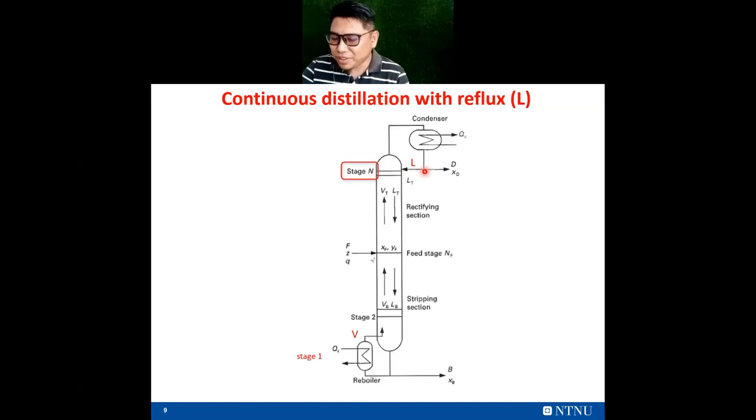Today we are very fortunate to have one of the world known process control professors, Professor Sigurd Skogestad from Norwegian University of Science and Technology, directly from Norway. In this webinar series, Professor Skogestad will present and discuss the topic of distillation modeling and control. Before I give this session to Professor Skogestad, let me give a little biography. Sigurd Skogestad is Professor of Chemical Engineering at NTNU in Trondheim, focusing on process control.

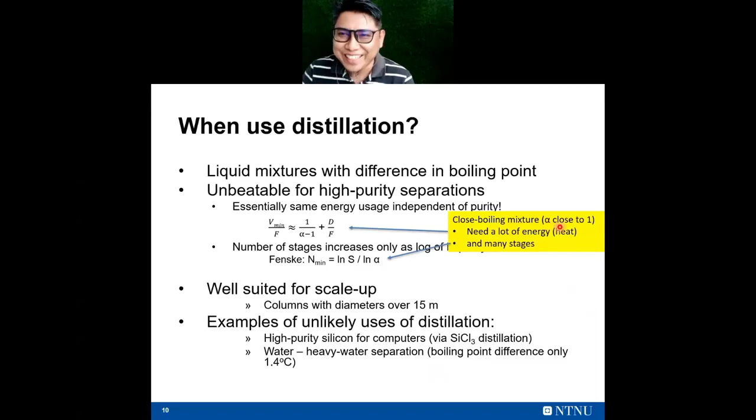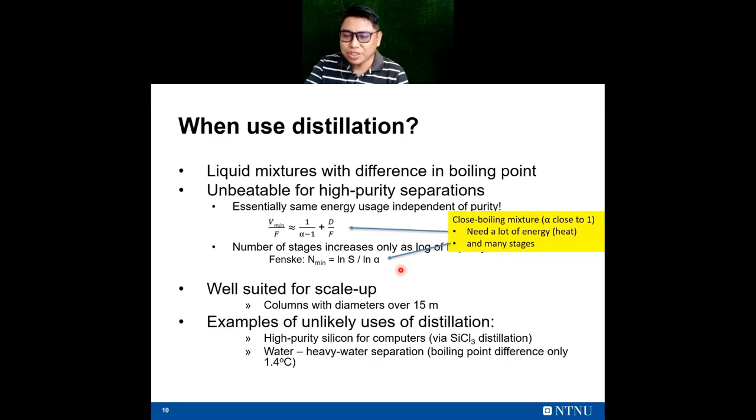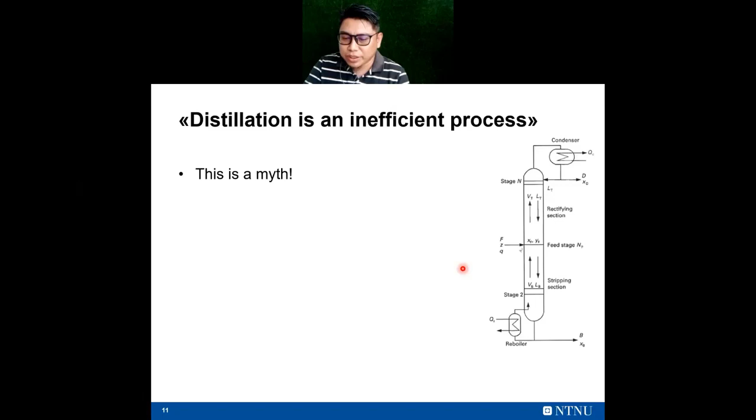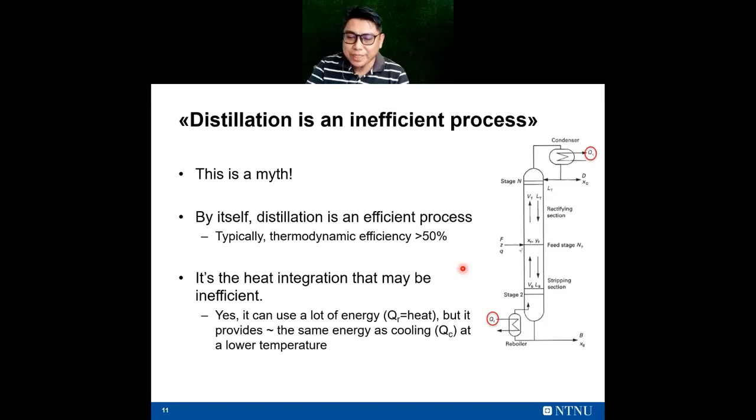He received a PhD from California Institute of Technology, Caltech. I'm reading your CV from your website. He has been a full professor at NTNU since 1987. He was head of the department of chemical engineering from 1999 until 2009, which is 10 years. Since 2015, he's been director of SUBPRO, a Center for Research-Based Innovation on Subsea Production and Processing. His research interests include process structure design, control structure design, and plant-wide control, optimal operation of process systems, modeling for control, robust control, PID control, and distillation column.

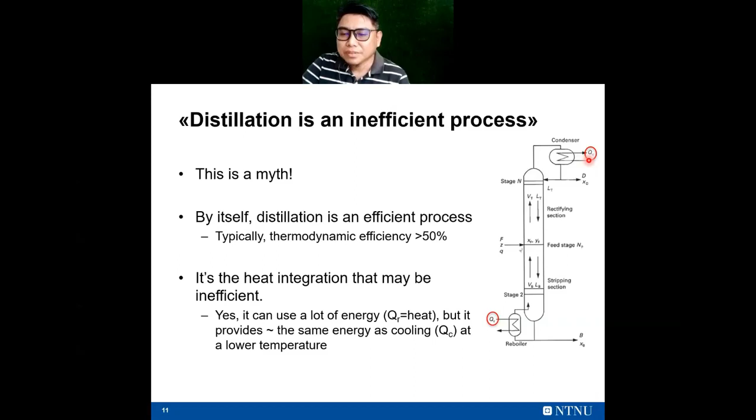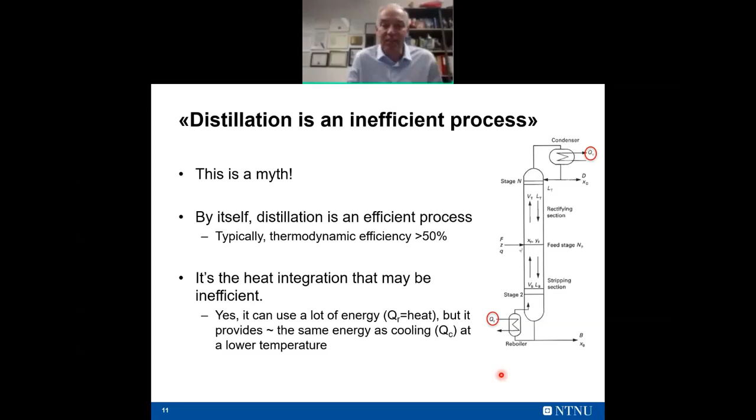Thank you very much for a very nice introduction. I think you covered most of my background, and I'm very happy to present this topic of distillation for you, because I've worked on distillation for many years, since the beginning of my career, and it's one of my really favorite topics. In addition to process control, distillation has been my main interest. It's a very interesting process, and it's very important in chemical engineering. So I will try to give you some background about it here today.

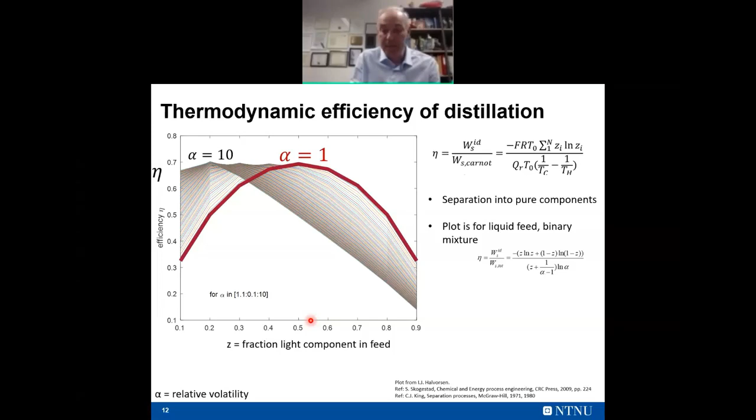So, about the talk today: it's about distillation, modeling, and control. I'll start with an introduction, a bit about the basis for the process. Then I'll talk about modeling, which is fairly easy in principle for distillation. I'll talk a bit about dynamics, optimal operation, and then control. So those are the topics. Let's start with the basis for distillation.

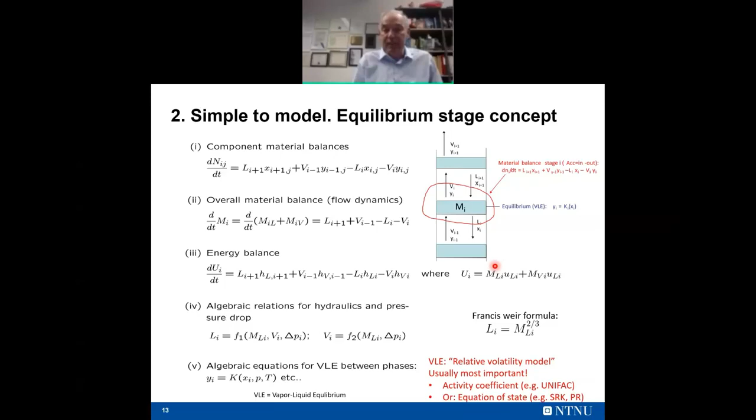A very important quantity is what we call relative volatility. You take the ratio between Y and X for the light component, which is greater than 1, divided by the ratio between Y and X for the heavy key component, which is less than 1. You get a number, alpha, which is greater than 1. If it's very close to 1, it's very difficult to separate using distillation. If it's large, it's good for distillation.

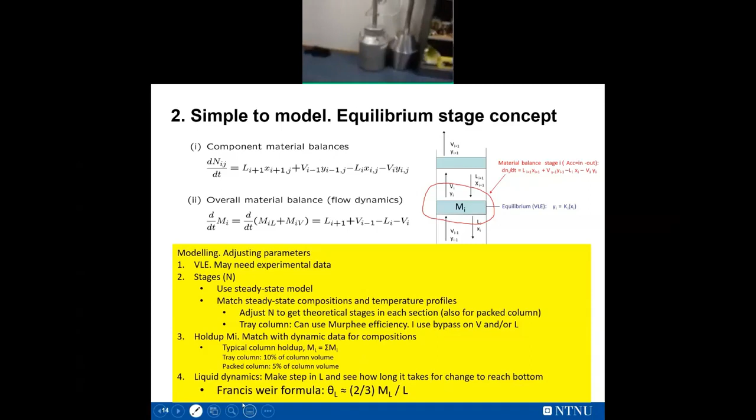Now, I actually have in my office a couple of columns, which is also batch distillation, but have reflux. I don't think you can see them here. I think so - here there's two columns, a bit similar design. Both of them will have reflux.

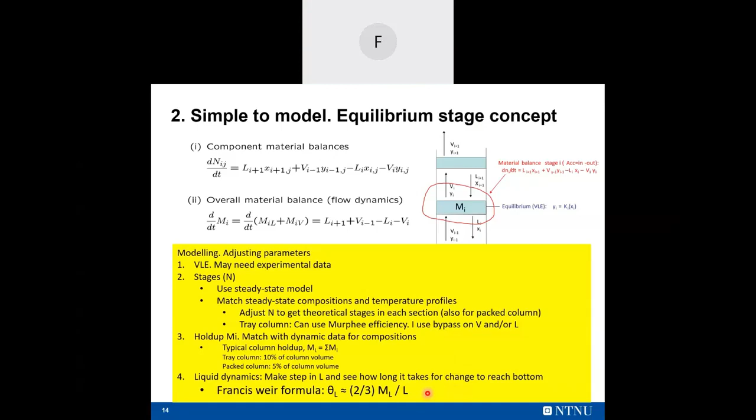And reflux also makes it like a recycled process, so it makes it a bit more difficult to model and understand. So this is...

I want to show you a continuous distillation column with reflux. This is how we separate in industry, and this is what we're going to be talking about today.

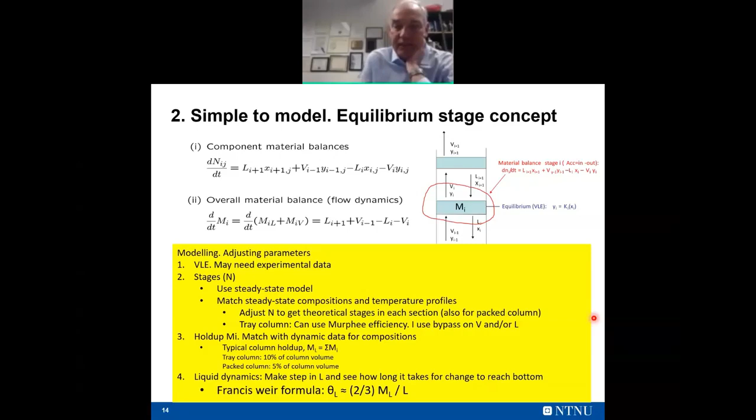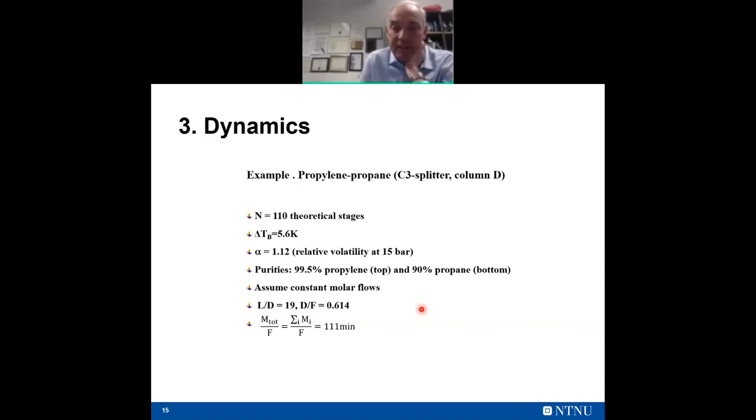So when do you use distillation? Well, you use distillation for liquid mixtures with difference in boiling points. That's the main starting point. And it's a very effective and easy, good separation, used a lot in industry, probably the most used separation method.

It's essentially unbeatable for high purity separation, and one reason is that the energy consumption is essentially independent of purity. It doesn't matter if you have it more pure, it doesn't cost more energy. And also the number of stages that you need to separate, that of course increases with the purity, but only in a logarithmic fashion. So it doesn't increase so sharply.

Also, distillation columns are well suited for scale-up. You can have columns with diameters up to 15 meters. And it's used even for some unlikely separations, like all the silicon that's made for computers is made by distillation via silicon chloride. Also, actually, heavy water separation is done by distillation, and it only has a boiling point difference of 1.4 Celsius. So it's used for many, many things.

And one thing that you should note is, of course, that for close boiling mixtures with alpha close to 1, relative volatility close to 1, then you will generally need a lot of energy or heat, and you will need many stages.

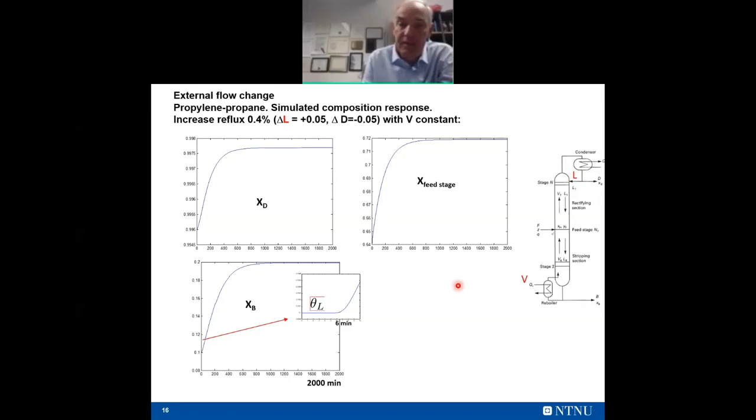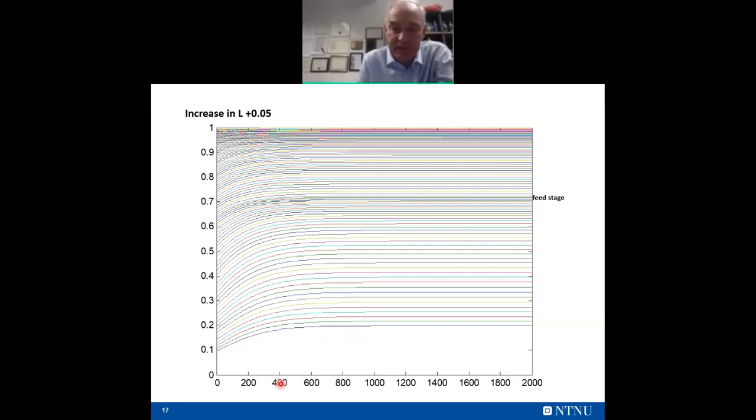So there's this myth, I would say, that distillation is an inefficient process because it uses so much energy. Well, yes, it's true that it uses a lot of energy for difficult separations, but actually by itself it's an efficient process. Typically the thermodynamic efficiency of distillation is better than 50%. So the reason people say it's not efficient is not because of the efficiency of the process itself, but because the heat integration may be inefficient.

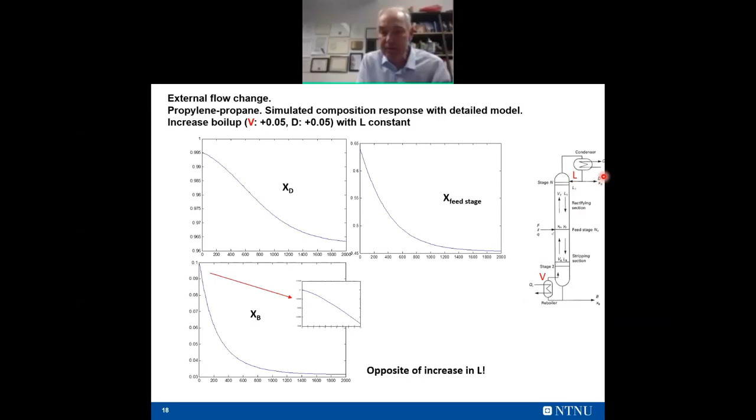Because yes, it may need a lot of energy to do the separation, but it provides the same energy back again as cooling at a somewhat lower temperature. For close boiling mixtures, this temperature difference is very small. So actually, by having proper heat integration, for example, you could have a heat pump between the top and the bottom. You can make very good heat integration and also get very good efficiency.

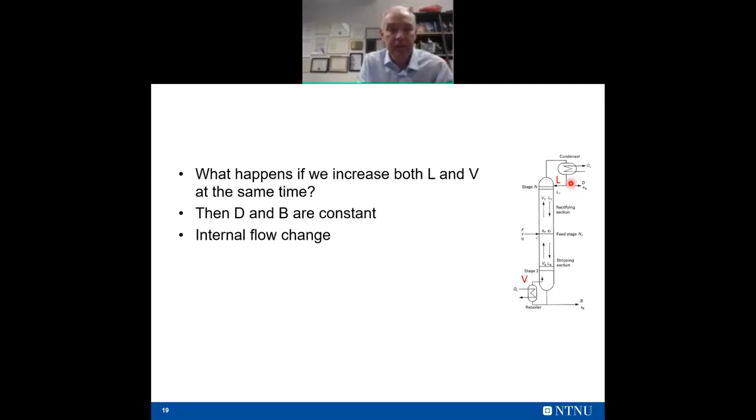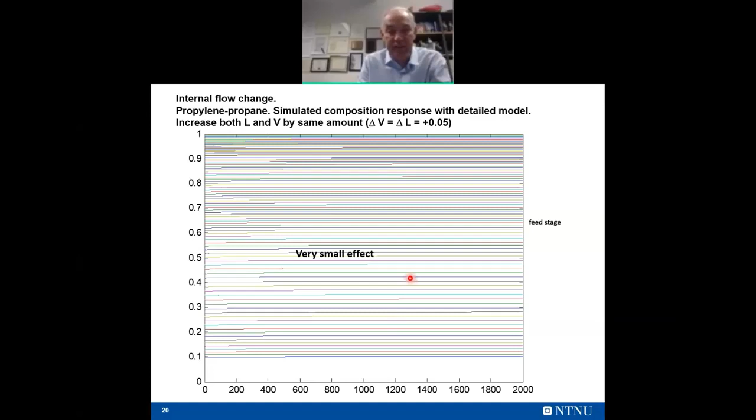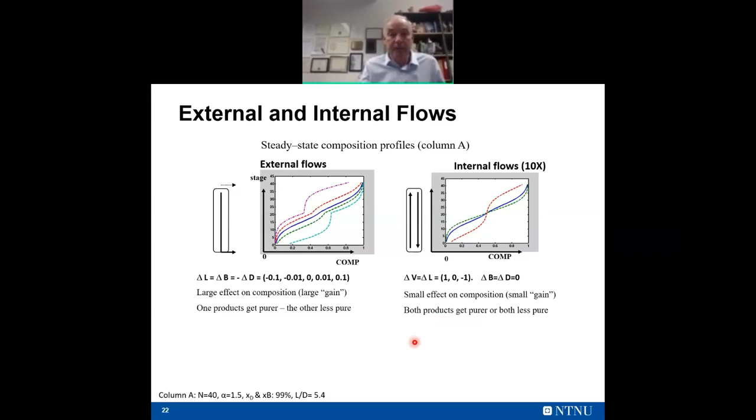And then a second thing now, about modeling. So modeling of distillation is in principle simple, and it's one of the simpler processes to model. It's a complicated process, but the modeling is simple. So normally what we use is the equilibrium stage concept.

So we model the distillation as just many stages in series, each having equilibrium between vapor and liquid on the stage. You have the vapor coming in from the stage below, the liquid from above, mixed on the stage, assuming equilibrium, and then you have the model.

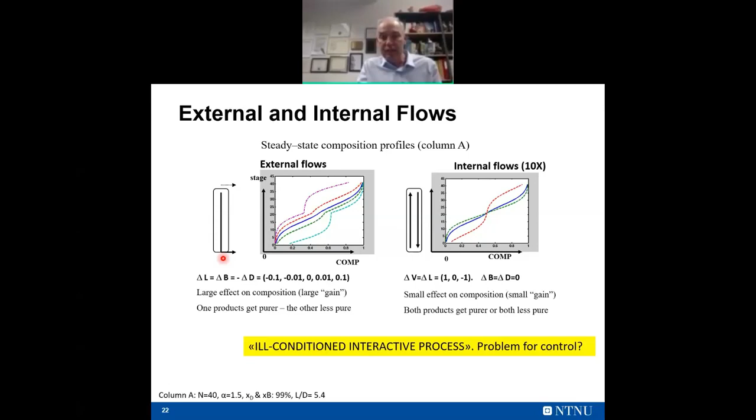And you have a lot of software now today. You have HYSYS, you have Aspen Plus and all these things, and you can quite easily model it. Sometimes people use non-equilibrium models, but I think in most cases the simple equilibrium models are efficient and are used in practice. So just a bit more detail about how you do the modeling.

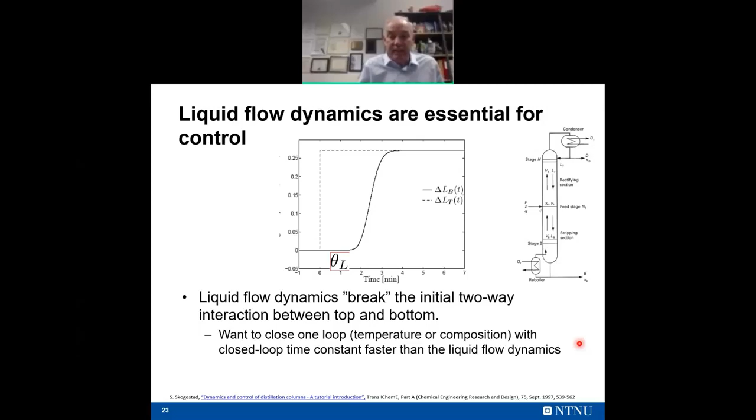For a tray column, where you have physical stages, you may introduce things like Murphree efficiency. I often use bypass instead of this. I let some of the vapor bypass the stage, and use this to represent non-ideal trays not having equilibrium, or having bypass of the liquid. Instead of the Murphree efficiency, I usually use bypass.

Then you need to have data for the holdup if you want to do a dynamic model. So you can use data for how long the liquid takes from the top to the bottom, for example.

Typically, you can also use typical data. For a tray column, 10% of the volume is liquid, and for a packed column, maybe about 5% or less.

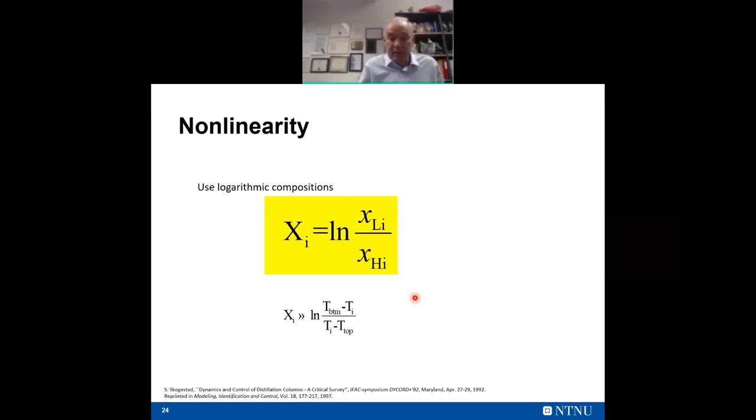And then you need to have data for how fast the liquid goes from the top to the bottom, and you can get this from measurements, because this liquid tray dynamics are very important for control. I'll talk about that later, but this is really important for control - the fact that it takes some time for the liquid to go to the bottom, so that needs also to be included in the model.

So in summary, modeling is in principle fairly simple for distillation. If someone has any questions, I can talk about that later. But usually, if you get the thermodynamics right, a model of distillation is more to be trusted than the data from a real column. The modeling is usually fairly good in terms of matching reality, from my experience.

So that's about modeling so far. Now I want to talk a little about dynamics. Distillation dynamics are known to be quite slow, or almost integrating slow responses.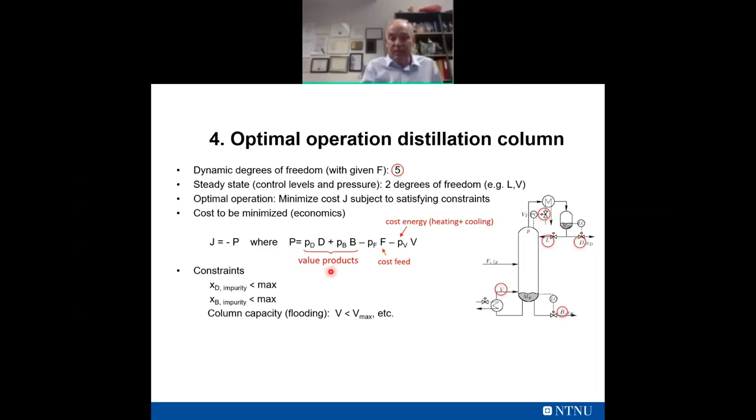So this, from a control point of view, does not look good, because it means that it's very ill-conditioned or interactive, this process. You would think that this gives you a problem for control. And actually, in my PhD thesis, I studied this system a bit, and I found out it was very difficult to control.

I studied the system without looking at the liquid flow dynamics, because there is one very good thing for distillation—these liquid flow dynamics. They're very important because they actually make control easier. The liquid flow dynamics is the fact that when I change the liquid in the top, it takes some time to reach the bottom, and this makes control much simpler than it would otherwise be. Fortunately, all real columns have liquid flow dynamics, packed columns or tray columns, so that makes control easier.

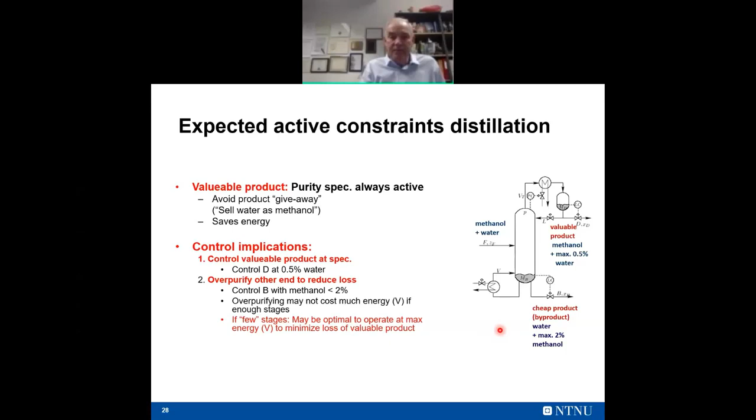So I have a question about the distillation column design. For the design, are there heuristic methods, or do we use model-based design?

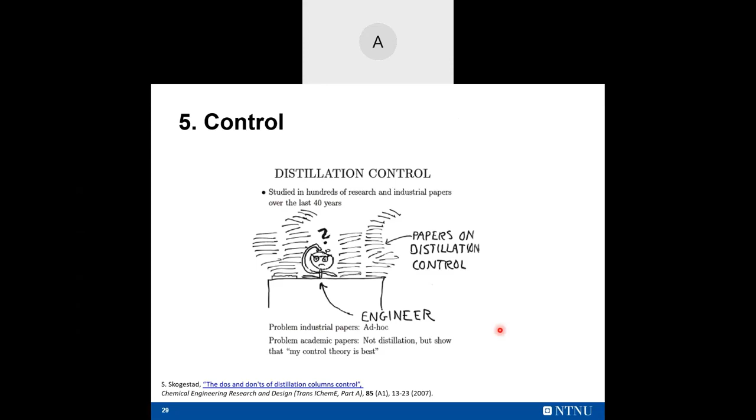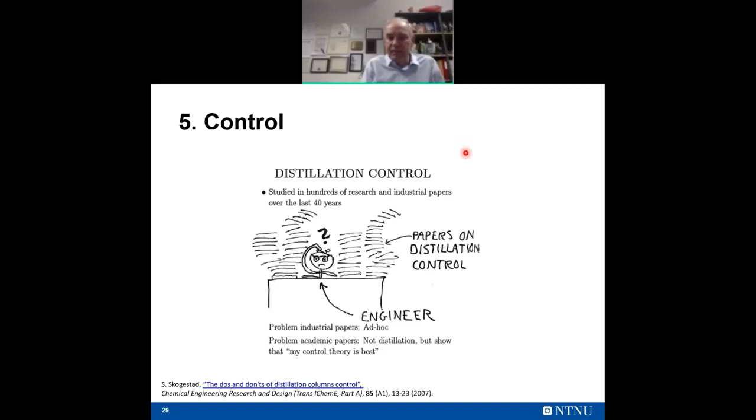Usually we use model-based design. Of course, there are what we call shortcut methods that are used, but normally we use the detailed models to do the design of the column, and it's in principle easy to model. The solution can be a bit difficult—it's not that easy to solve these equations, but the software today is quite reliable in most cases. So distillation is a complex process, but usually the models for the process are quite working well. That's one good thing about distillation, that you have good models usually.

Another thing I'll mention now is nonlinearity. Distillations are known to be very nonlinear, and that's a problem for control, of course.

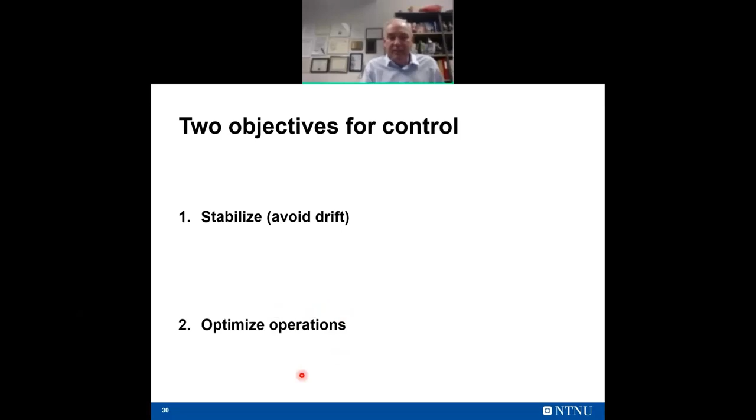What you can do, and it's very common, is to use logarithmic compositions. So instead of using the mole fraction of the light component and controlling that directly, you take the ratio between the light and heavy component mole fraction, say in the top product, and then you take the log of that and control this instead. This is not only that the log makes everything linear, it also has a strong theoretical basis. I have a paper where I've written about why you can do this.

You can also do it for temperature. If you're using temperature control, you can use something like this to get a more linear response. So this can be helpful for control.

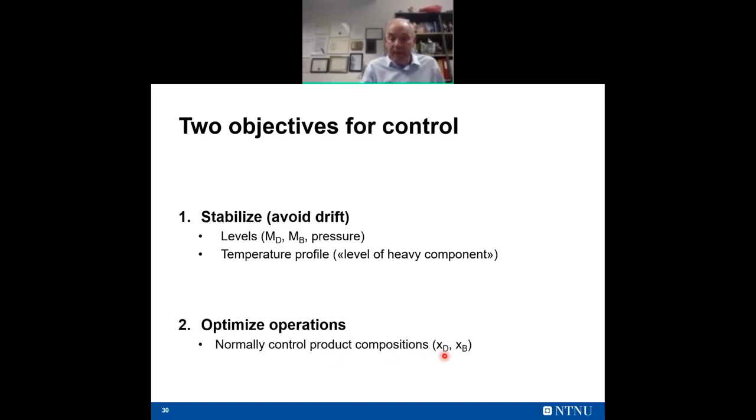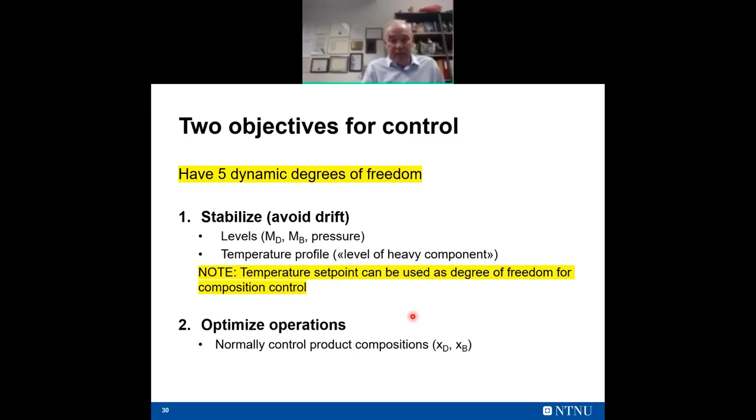Just to make some conclusions so far in terms of dynamics: what you see is that the dominant response is first order, and it's often close to integrating from a control point of view because the time constant is so large. The time constant could be several hours, and you don't want to wait several hours for control, so it's like an integrating process almost for control.

Another important thing for control is that we have the liquid flow dynamics that decouple the top and the bottom on a short time scale and make control easier. And the third thing for control is that logarithmic transformations linearize the response, especially dynamically. So that's so far on the dynamics.

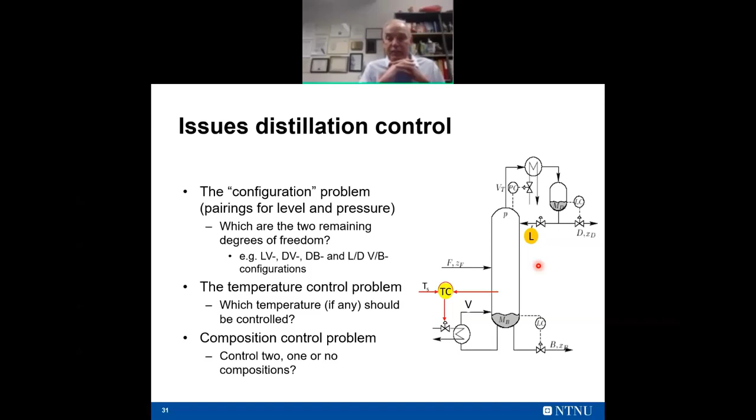So then I want to talk about the main topic here today, which is on operation and control. The reason for building a distillation column is, of course, to separate the mixture and overall to make a profit for the operator. So if you look at it from a control point of view, this is a distillation column. We have the feed here, the distillate product, the bottoms product.

Essentially, from a control point of view, there are 5 degrees of freedom, 5 valves that you can change, shown in red here. I've assumed here that the feed is given — there may be cases where this is used as a degree of freedom, but for now assume it's given. Then you have 5 degrees of freedom: the heat input is number 1, the reflux is number 2, the cooling, which is used to control the pressure normally, is number 3, called VT here, and then there's the distillate flow, the product in the top, and the bottom flow in the bottom.

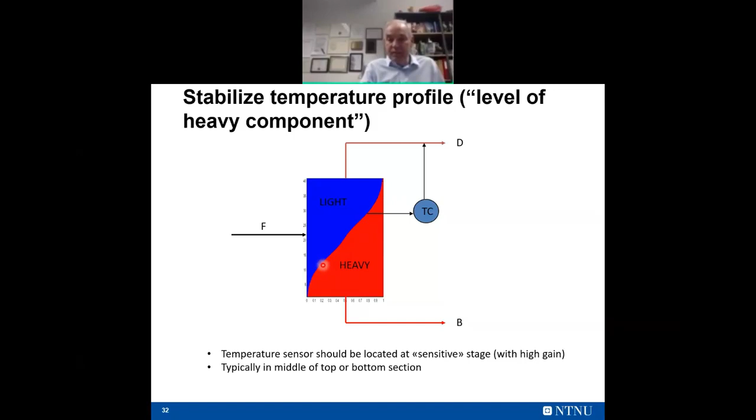So there are 5 degrees of freedom from a dynamic point of view, but for steady state operation there are only 2 degrees of freedom normally, because we need to control pressure and the 2 levels. The 2 levels have no steady state effect, and the pressure also has a very small steady state effect and is usually fixed. So there are only 2 degrees of freedom left for operation. So how do we adjust these 2 degrees of freedom to make a good operation?

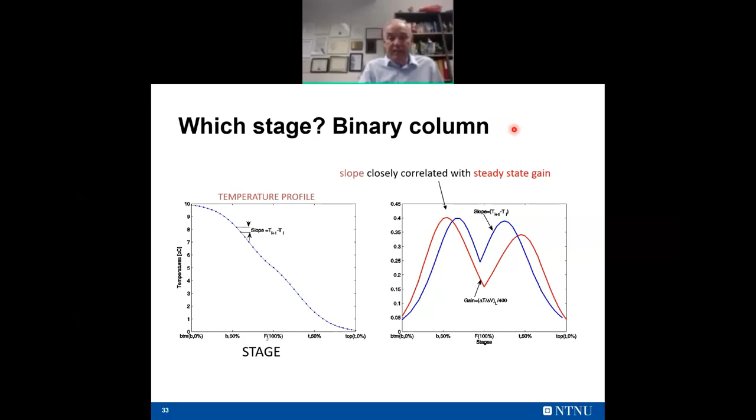That's the question. And what we want to do is generally minimize a certain cost. We want to define a cost function for the column, and minimize this with respect to the 2 degrees of freedom, subject to satisfying constraints. This is the general problem for operation always.

So if you look at distillation in particular, the cost function is quite easy to define. You can define a profit function for the column itself, as the income, the value of the 2 products, the price of the product in the top and the price in the bottom, minus the cost of the feed, minus the cost of the energy. And the energy includes both the heating and possibly the cooling cost. So you want to maximize the profit, or minimize minus the profit.

And the constraints are on the purity. On the top, you have a purity specification usually. You have a purity specification in the bottom, and you have lots of capacity constraints like maximum flow rate you can have, maximum vapor, maximum pressure drop, and so on.

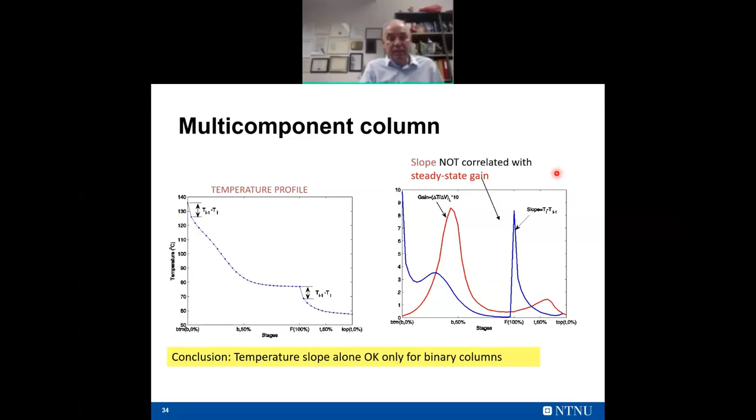So the question is then what's going to be optimal? Sometimes you can have both these constraints being active, and you want to control both purities, but that's not so common. The case usually is that only one of these purity constraints is active, and the other end might be over purified. The reason for over purification is because you want to maximize the amount of valuable products, so there might be cases where you over purify to get more valuable product.

So to say this more clearly, what are the expected active constraints for distillation? The reason I put emphasis on active constraints is because these are things that you need to control. So that's important for control.

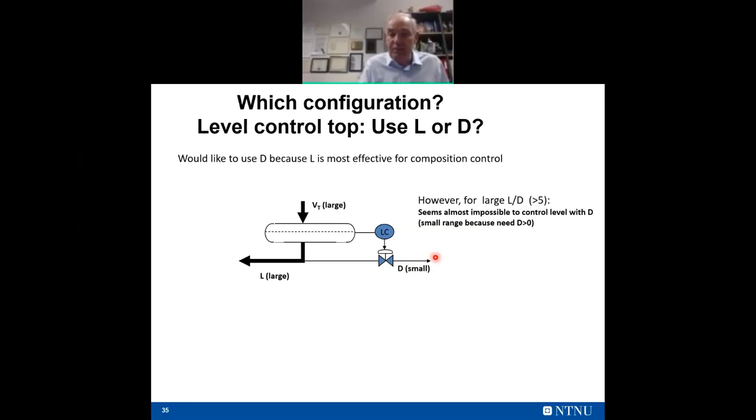So what you see for distillation is the operation of the column will depend on prices, it will depend on specifications, and it can change all the time. It's usually not the case that the distillation column will have the same control structure forever. Things might easily change with time. Sometimes energy is expensive, you don't have vapor or heat available. Other cases, you might have a lot of excess energy and you want to use it here. So the control of the distillation column depends on what's around the system, but you need to be able to make a control system that adjusts to the market and changes.

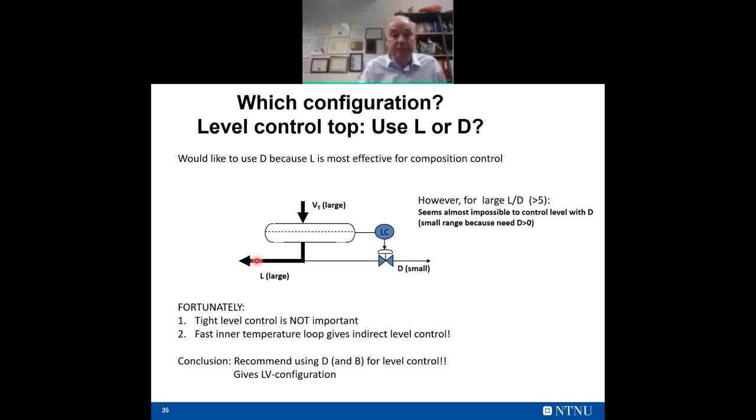So we are over to control. Distillation control has been studied in many papers, especially when I was a young engineer. There were lots of papers coming out, and it was very confusing and difficult to understand what was going on. So I worked on this topic for many years, trying to make it more clear. The reason why there's a lot of different papers is because some people put emphasis on pressure control, others on level control, others on composition, and also many people don't really study distillation, they're more studying control theory, so then it's not really a distillation paper. I wrote a paper more than 10 years ago where I tried to sum up some of my experience, called the do's and don'ts of distillation column control. Some of the things I'm presenting here today are from this paper, so you can have a look at that if you want.

Now, for control in general, there's two objectives. This is for any control problem. There's the first objective of stabilizing operation, avoiding drift, and the second objective of optimizing operation to make it profitable. So the second part has to do with minimizing cost and satisfying constraints.

Now, for distillation, this means that you want to control the two levels and the pressure, because if you don't control the levels and pressure, it will not be stable and will be drifting. In addition, you usually want to control the temperature profile, the level of heavy component you could call it. This is also because this is almost like a drifting thing, remember it was like integrating, I said. So to stop this drifting, you often want to control a temperature inside the column.

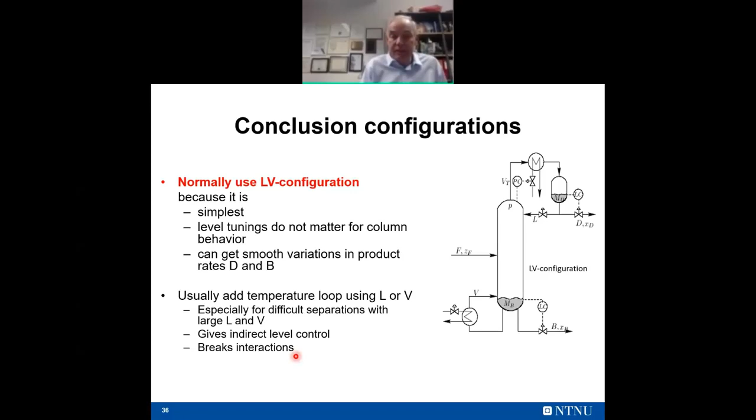And then to optimize operations, normally we control product compositions. So those are the two things we want to control. Remember that we have 5 dynamic degrees of freedom, and I controlled 3 things here, 2 levels and a pressure, and the temperature, 4 things here actually, and 2 things here. How is that possible? I have 4 plus 2, that's 6. Why it is possible is because this temperature set point can be used as a degree of freedom for the steady state operation. So that's why 5 degrees of freedom actually is enough by using a cascade control system.

So this is showing you typically how things are done in practice with the so-called LV configuration and a temperature loop. We'll get back to that.

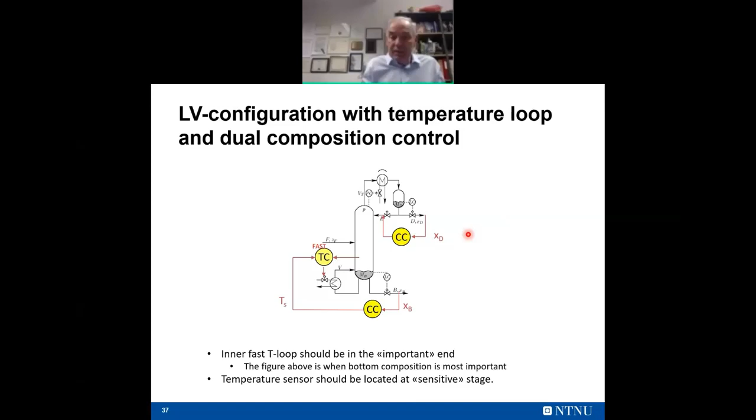So there's several issues here when it comes to control of distillation. The first thing is the issue of how to pair the levels in the top and the bottom. In this case, I've chosen to use the distillate flow for the level in the top, but I could have used the reflux, that's also fairly common. And the same in the bottom, here I'm using the bottom flow to control this level, but I could have used the heat input. And it's also possible to use the ratios.

And all these different choices give you what we call different configurations. That's based on what: so if you have the LV configuration, it means that after you close the loops for level and pressure, L and V are remaining as degrees of freedom for steady state composition control. So that's the first issue, how to do the level control and the pressure control.

The second issue is then this temperature loop, if we should have it, and where it should be located. Here it's located in the bottom, but it could also be in the top, that we could have a cascade going to the reflux. And finally, there's the composition control problem: should we control 2 compositions, 1 composition, or maybe no compositions? It actually varies.

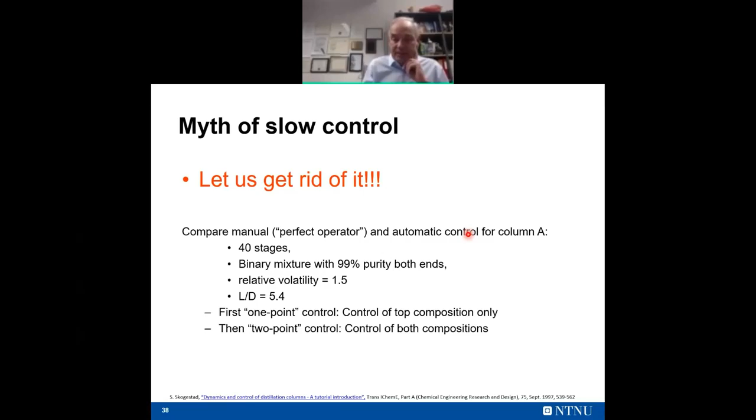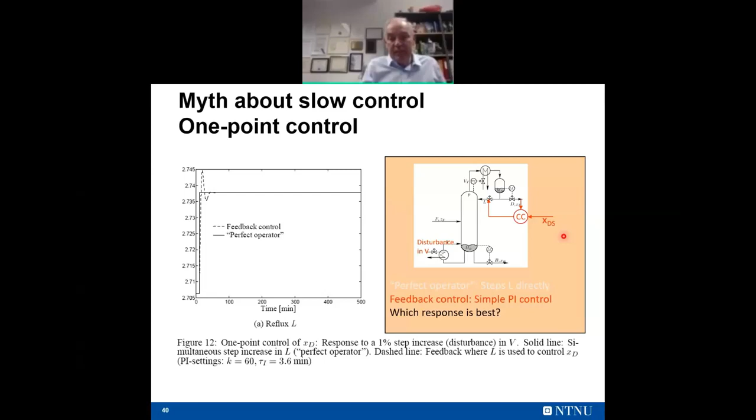And to locate the temperature sensor, it should of course be fairly close to the end, but not at the end, because there it's not sensitive. So it should be located at a sensitive location with a high gain. And typically it will be at the middle of the top section or in the middle of the bottom section, maybe a bit closer to the bottom.

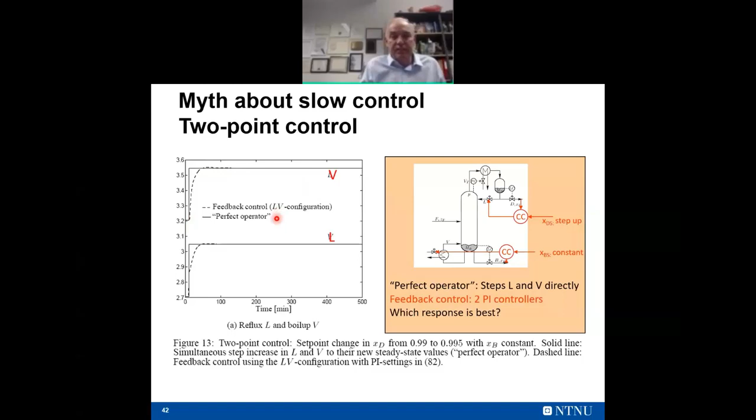If you look at the top, the main issue is should I use the reflux or the distillate to control the level? This is the top of the column. The condenser is here, so liquid comes into this tank, and some of it is sent back as reflux, and some is taken out as distillate product. Normally I would like to use the distillate flow to control level, because the reflux has a much more direct effect on composition, so it's much more effective for composition control. If I used distillate for composition control, it would be much more indirect.

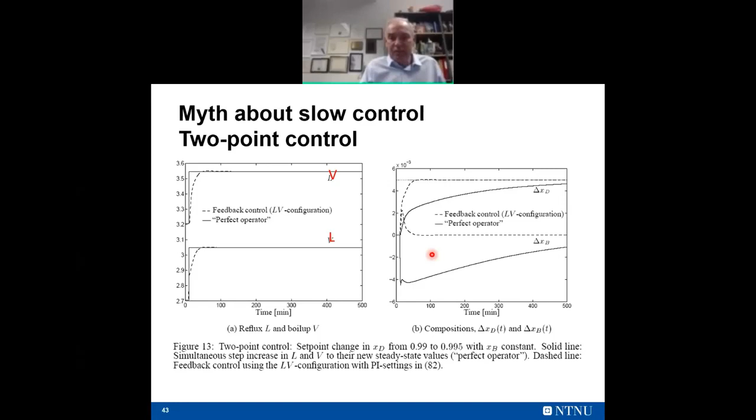So this is what I would like to do, but I can see some problem here for control, because if the reflux is really large compared to the distillate, then if I want to make a change in reflux to control composition, so I increase this one, the distillate needs to go down by about the same amount. And if this is small, it might easily become zero, and then it's not possible to control level anymore. So this doesn't look so promising for a column with a high ratio. Difficult separations have a high ratio L over D, and it seems like this is not going to work well for difficult separations, like the propylene column.

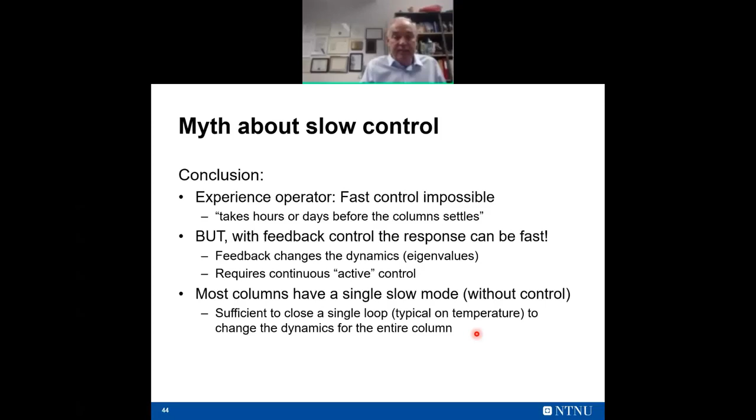But fortunately, there's one very nice thing here. The first thing is that tight level control is not important in itself. We can let this level drift a bit up and down. And the second important thing is that if you have a fast inner temperature control, or actually composition control loop, this will provide indirect level control. That's because the reason for having changes in the vapor flow or having upsets is because of change in the composition. Having this temperature loop will automatically or indirectly provide level control.

One way of looking at it is to imagine a column that has essentially no distillate product, or extremely small, so you're just building up the product in the top. Some separations are like this, where you have a very, very small amount of the light component in the feed. You just build the distillate product up in the condenser. This can actually be controlled without any level control. By having a temperature loop, this will build up by itself, and it will have indirect level control by the temperature loop.

So the conclusion is that this control structure, wherever I use distillate flow for level control, this is what I generally recommend for all columns, even for difficult separations. This gives you what we call the LV configuration, where L and V are left for composition control. So that's my recommendation for how to do this.

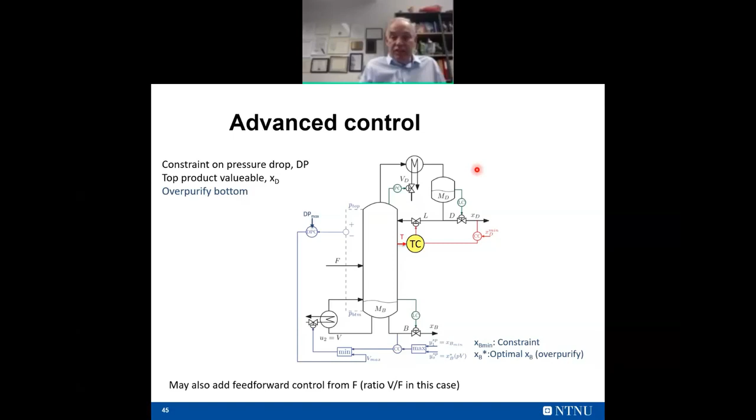So you get this structure here that we looked at already. We have to look more detailed. We have the distillate flow controlling the level, the bottom flow controlling the level in the bottom. The cooling is controlling the pressure inside the column, and that's essentially the holdup of vapor inside the system. And we have left for composition control the heat input, the vapor flow, and the reflux.

So the reason we use this LV configuration is because it's the simplest. The level tunings do not matter for column behavior, so that's very important. Even if I change this level controller, it will not change the composition control. And we can also tune this level control, it doesn't need to be tightly tuned, so we can get smooth variations in distillate and bottoms.

We usually add a temperature loop using L or V, and especially for difficult separations with large L and V, this is a big advantage, and provides indirect level control, and also it breaks the interactions between the top and the bottom.

Just a quick question, Doctor. For this slide, I saw that you put here to control the temperature is either using V or using L. But my question is, what if we use both? For example, let's say we have the desired temperature to be at the top and we have the desired temperature to be at the bottom. Hence, to meet that particular position, I use both V and L to meet that. And if I do that, what will be the impact?

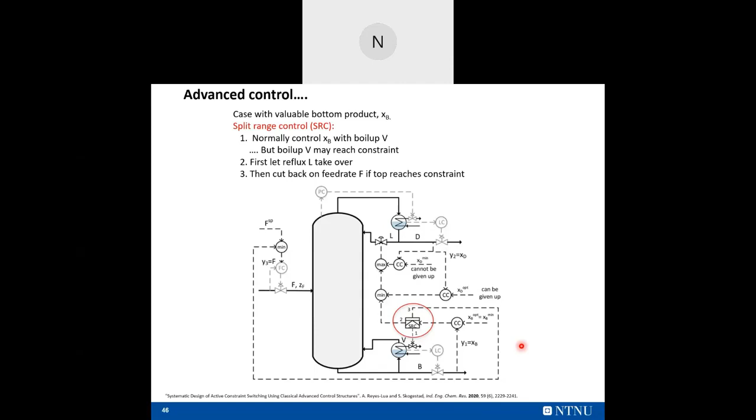You can certainly do that, yes. That's not a problem, but the most important is to close one, because just closing one breaks the interaction and stops the integration. But it's certainly possible to control both. I'll show an example of that shortly also. So it's not so critical to control both, but it certainly is done quite frequently. Okay, noted on that. Thank you.

So the bottom product is the most valuable. Now, if it was opposite, that this was most valuable, then I will put the temperature loop to the top. And the temperature sensor should be located at a sensitive stage, as I mentioned already. So this is a typical configuration that's used a lot, although there might be other options, as you just mentioned.

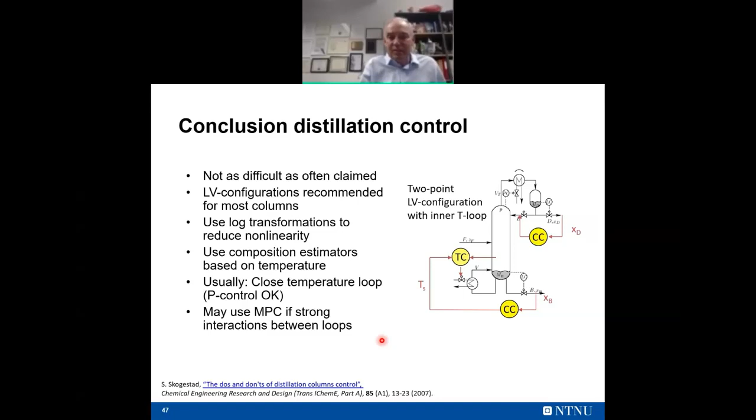Now I want to talk a bit about what control of distillation should look like. A lot of people think that distillation is a very slow process, so you need to have slow control. It's not true. You can have fast control of distillation columns, especially if you cannot use compositions directly. That's one of the main reasons for using temperature control, because if you use compositions it's often slow due to the delay in the measurement. But with the composition temperature loop, you can have much faster control because temperatures are easy to measure and fast measurements. I want to get rid of this myth of slow control.

So to do that, I will compare what I call a perfect operator with automatic control for a typical column. This column has 40 stages, 99% purity in both ends, relative volatility 1.5, and L over D of 5.4. So first I will consider one-point control, where we control top composition only, and then I will look at two-point control, where I control both compositions.

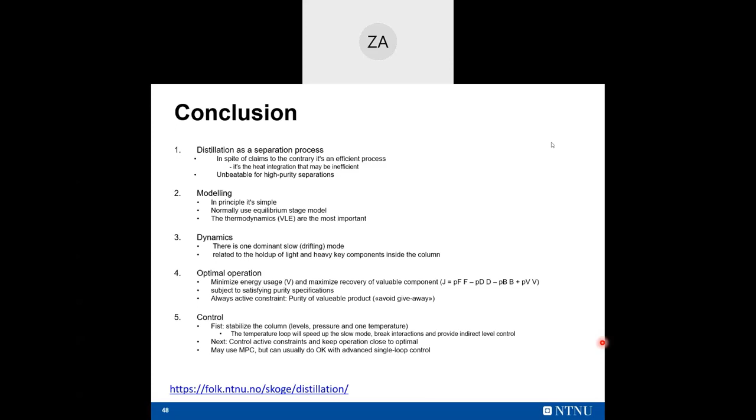people say you cannot control distillation columns because they're so slow. It's not true. The key thing is to make at least one loop fast to break the interactions, and change the integration, and you can get fast control even for a large distillation column.

So conclusion: the experienced operator thinks that fast control is impossible, but with feedback control, the response can be fast. The feedback changes the dynamics and requires continuous active control. And most columns have a single slow mode, so it's sufficient to close a single loop to change the dynamics of the entire column, but it is of course also possible to have several loops changed, or two loops.

I'm looking at time. I think I need to just have only 1 point left, which is a bit on advanced control now. I'm not going to talk a lot about advanced control.

So advanced control really for me, in this case, is doing changes to the system. So if you originally have, for example, a composition control, but then you realize you had problems with the maximum capacity, then how to do the switching.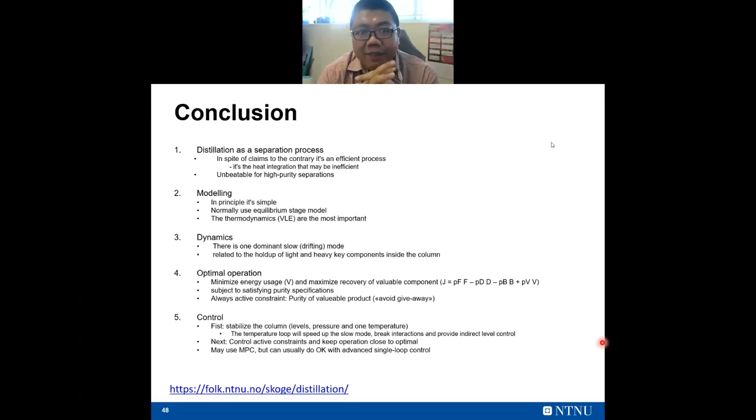No, not really by themselves. We usually use this because of the delays in composition measurements. So we need the inferential systems, yes, because we need usually to control compositions. So they're an important part of the system. I won't say they're really further improving it. Well, in some cases they can replace the temperature loop, of course, because they also will be quite fast. So it's something, for most columns, they need to have estimators, it's very common to have. I didn't talk about it today, but it's an important part of the system.

Okay, sure. There is one question here from a participant in the chat. The first question is, how can control help in separation processes with low relative volatility, which is the difficult separation type of column?

Yeah, so low relative volatility columns are the most difficult for control. They have strong interactions, for example, and slow dynamics. So especially for those separations, I think it's important to have at least one loop being tightly controlled. It doesn't need to be temperature, it could be composition, it could be some estimator. But you need this loop to break the interactions and stop the integration. I think if you do that, you will find that even very difficult separations can be well controlled.

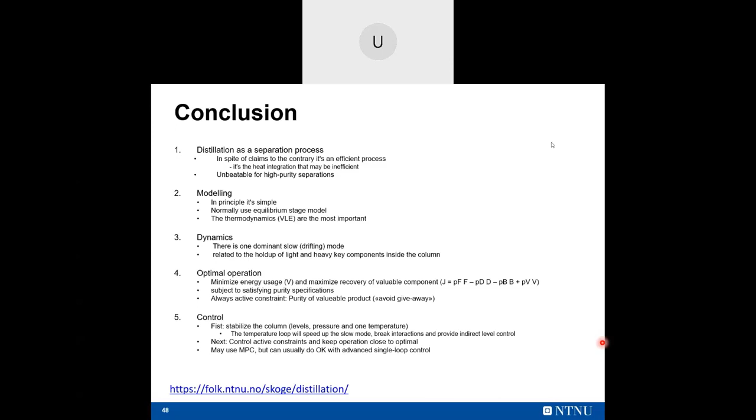Yeah, well, there's many cases. For control, distillation is usually part of a bigger system. So in terms of the whole integration and the recycle around the system, distillation itself is actually not a difficult process from a control point of view.

It's a good process to learn control, I would say. For teaching, it's good. And there's many different distillation columns, many different cases. If you look at the real applications, you'll see that the control objective changes a lot from case to case.

And also you have more complex separations. You have columns with side streams. You have azeotropic separations, which are difficult.

Also, this I didn't talk about today, but you have these integrated column sequences, like the divided wall columns. There are many things in distillation that people haven't really come up with good schemes on how to control in general. I presented only today the simplest case of one single column. I looked a bit into how in some cases you might need to cut back on the feed, and how to do changes.

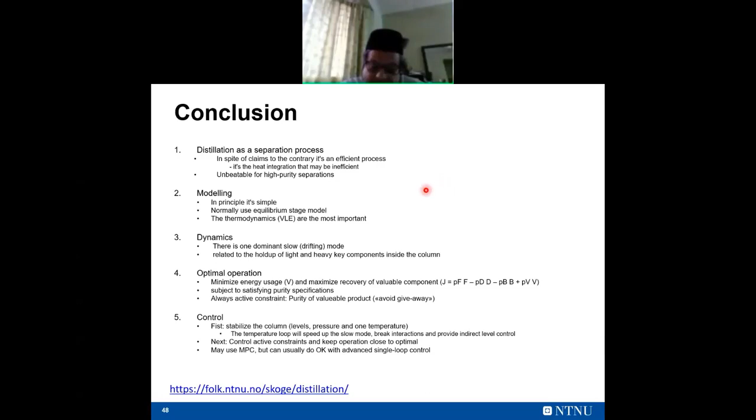So there's still many topics really to look into in research. It's not the end, there's a lot of things. Each column is different - there's a lot of diversity in columns. So the solution I presented today was to try to give one thing that works in most cases, just to show you.

I think it was clear from what I presented today - there's a lot of interesting things on distillation, which is important, and it is a very interesting process.

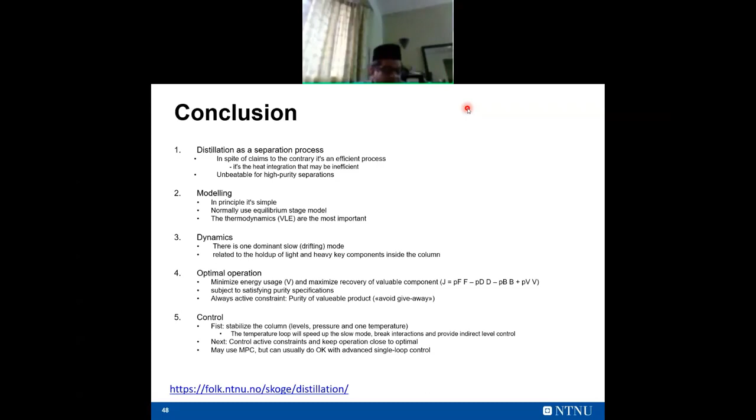In case we apply pinch analysis and heat integration on a distillation column sequence, would that affect the control system and the control law we are using? Yes, that's a good question. Of course, if you have a lot of integration from pinch, it can have a large effect, because it means the column will be very coupled to other units. This can make it very challenging, obviously. So usually what you try to do is handle it unit by unit, try to get reasonably tight control of the column, and then on a slower time scale you do the integration.

But sometimes integration is very tight and it can make things very difficult and challenging. So there was a question about challenges for distillation control - I would say this is one of them, definitely. It's not like it cannot be done. It's not impossible to do the control, but it gets challenging, and you might need to change the control strategy you're using. So yes, it's a good question, and the answer is yes, this can have a large effect on the control. It can change things about what I told you.

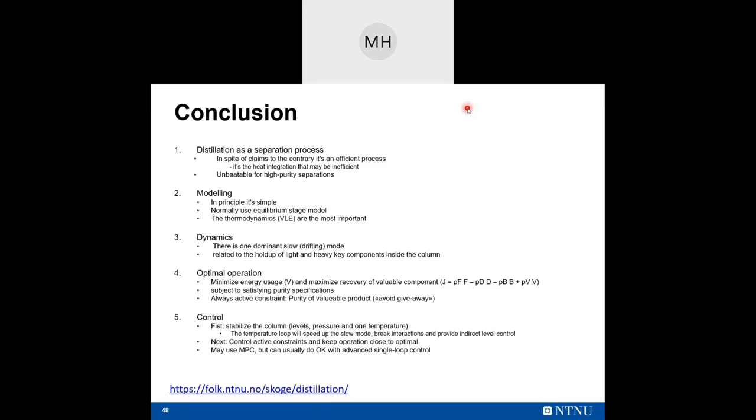Well, I agree with what you said, that in many distillation papers they don't really talk about the distillation, they talk mostly about their control theory. And the model they use is often too simplified. I think that's what you're talking about. If you use the wrong, simplified model, of course you will not get good conclusions. In many cases, or at least some cases, people don't even include the liquid flow dynamics, and then they will reach wrong conclusions on distillation control. Also, they assume you can have perfect measurements without noise at the column ends, which is very unrealistic. The reason we don't control the temperature at the very top of the column is because it's very sensitive to noise, so we need to move it to a more sensitive location. If you neglect noise on the measurement completely, you can make very unrealistic designs. Especially in electrical engineering papers, or old papers on distillation from many years ago, people were just using state space models, and you can get very unrealistic conclusions about control.

Okay, there are more questions here from the chat. Let's take question number 5: knowing that robust control methods tend to be conservative, what kind of robust control technique would be appropriate for distillation column control?

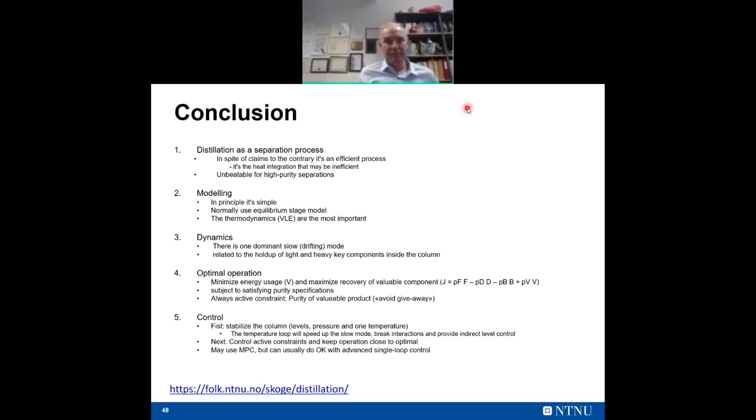Well, I... in this talk I didn't talk so much about robust control, I talked about just using simple PID control loops. They are usually robust in themselves. You usually get problems with robust control when you have a lot of interactions. I'd say robust control is not used a lot in practice for distillation today, because it's not such a difficult problem as I thought originally, due to this decoupling with the temperature, or with the liquid flow dynamics.

So it's not a very difficult problem for robust control, I would say. Robust control methods come in when you have strong multivariable problems, where MPC, for example, is not robust. Then you can go to robust control. I wouldn't say distillation is necessarily such a case. There could be cases, especially with more interactions and more heat integration, where there's more need for robust control methods, but I haven't really looked at that.

Okay. Another question from the chat: for high nonlinearity situations in distillation columns, would data-driven, also known as machine learning-based control, be preferable to classical control theories?

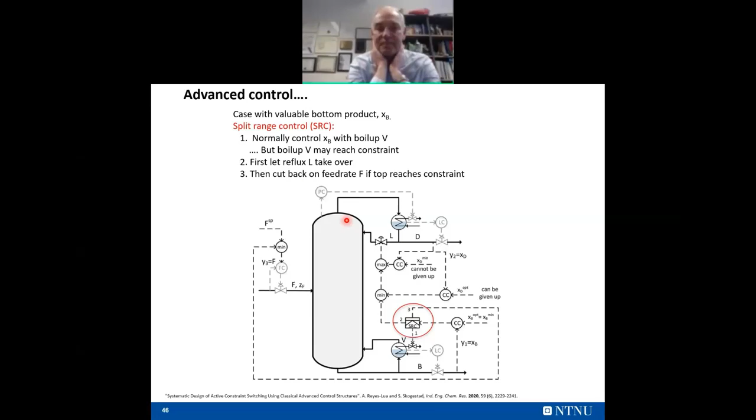Is there any question from the audience? I saw someone was asking. Okay, there is the last one here from Dr. Aslinda. What would be the direction of distillation column control in the future?

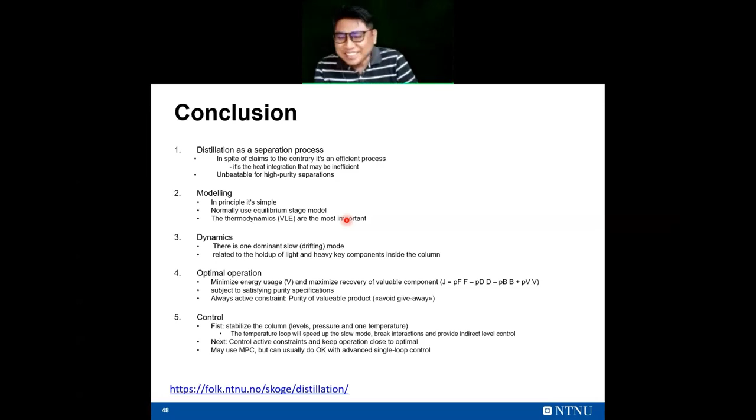That's a tough question. Very tough question. I think we mentioned already lots of these things about more integrated processes, and also you have these direct coupling things. You have also separations involving isotopes, more complex mixtures. There's a long list of things to look at.

Now, in terms of fundamental things, it's a complicated process, interesting process. There's lots of things to do. I don't know if I can point out any one single thing to do.

What I can say is that I think these processes can be controlled, and we should not stop working on them, because they are important processes, and the control can be improved. There's still a lot to do, at least in practice. If you look at how real columns are operated, it's often not operated well.

Actually, I'll tell you, the main problem when I go in practice and see a column that's not operated well is usually because of the level control. The level control usually is the main problem, because people use too much integral action and then start oscillating the levels.

This is just a warning to people in industry: if you have problems with oscillating columns, try to look for the levels first and make sure this is not the reason.